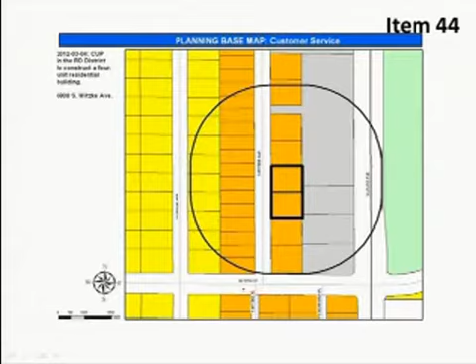Again, Mr. Glenn Foster is the petitioner representing Cascade Townhomes. This is a proposed development in the Platinum Valley Edition, west of South Louise Avenue and just north of West 77th Street. Mr. Foster had requested approval to construct 2 4-plexes. This is an area that's zoned such that a 4-plex requires a conditional use permit. Single family and twin homes would be allowed without a public hearing.

At the public hearing for the Planning Commission, we have a consent agenda. This was on the consent agenda based on the lack of public input that we had heard or comment. And unfortunately, some of the citizens that were present at the Planning Commission meeting, there was some confusion that they were not able to get up and speak and ask this to be considered as part of the regular agenda. So after the Planning Commission approved this as part of their consent agenda, we heard from the group of neighbors that they would like this to be heard one more time.

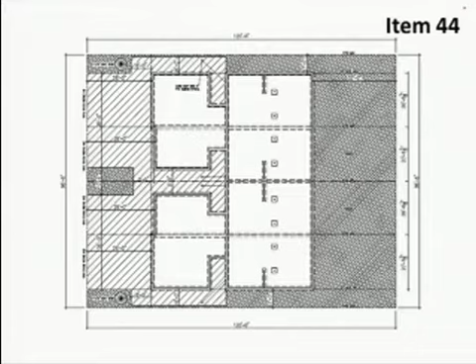In this particular area, there are existing fourplexes directly to the north. On the west side of Witzke Avenue is twin homes, and then west of that is single family. To the south of the proposed fourplexes is currently vacant, proposed for twin homes, creating this transition from fourplexes to twin homes. And then to the east of the fourplexes is commercial and office abutting up against Louise Avenue.

The appeal was submitted by the Witzke Homeowners Group, the residents of the twin homes on the west side of the street. Their concern is the value of the fourplexes, the proposed construction value, the market value of those structures. They also have concerns about parking and traffic along the street.

Mr. Foster is here tonight to speak to the neighborhood concerns. He conducted a neighborhood meeting prior to the Planning Commission hearing. The fourplexes will be two-story buildings with 6 garage parking spaces.

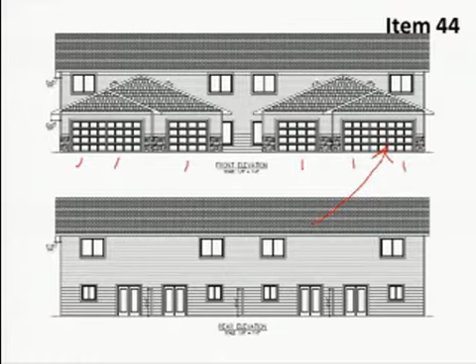Another change we want the neighborhood to know is that the existing fourplexes are 3 bedrooms, but these are proposed to be 2-bedroom. So that's a quick background. Both the applicant and the neighborhood association are here to comment on this item tonight.

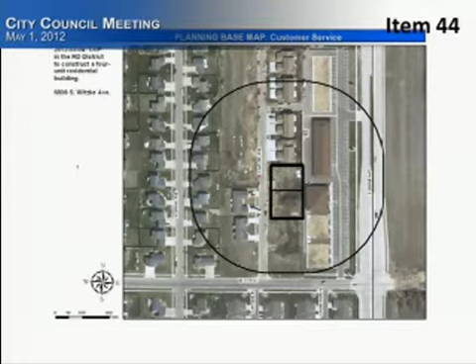So I guess my whole point is I want to keep the neighborhood bright. That's why we changed the bedrooms and increased the parking. We almost doubled the parking and decreased the amount of bedrooms, trying to take care of the problems that the neighbors are having over there. As far as the garbage cans, I know it's a city code ordinance for the dumpsters, and they're not my properties. So that's all I've got to say about it.

Thank you, Mr. Foster. Is there anyone else who wanted to speak to the council? Very good. Council, questions or comments or motions? Councilor Jamison.

If we could have Mike Cooper come back and help us a little bit. Mike, the pictures that we saw there with the neighbors, with the empty driveways, where are those homes compared to this picture? Those are to the north, or to the top. So they would be to the north of this proposed development, directly to the north.

Those are existing fourplexes. When they showed their own homes, where are those? They're on the west side. This photo is a little bit out of date, but okay, right, across the street. So if those two homes that are across the street would just be continued north?

Correct. And then again, to the south of the property that we're considering tonight will be twin homes. So those will stay twin homes? Yes. But the ones outlined would move to the request for those to be the fourplexes.

Councilor Rolfing: For the association, could you answer a question for me? Sure, come up please.

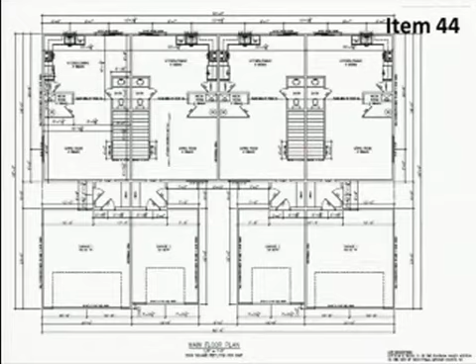The other thing is, you stated that the property to the south there was twin homes. Will be twin homes. It's still vacant. Are you positive they're going to be twin homes, and they won't come and ask to build something else? Yes, we would not support it if it did come forward, but yes. That's the understanding of everybody, that that will be twin homes. It's the understanding though, that they're not going to come and ask for fourplexes? Yeah, that's based on previous public hearings that we've had, and it's a different property owner.

Councilor Anderson Jr.: Mike, if you're not going to support fourplexes there, and you have twin homes to the north of this proposed development, why are we putting fourplexes in the middle of a bunch of twin homes? Yeah, when we had previous public hearings on this item, it was primarily based on the type of office retail that was along Louise Avenue. And so as we got closer to 77th Street, across 77th Street to the south, that was kind of the transition area to get more in line with what's on the south side of 77th Street. So we were trying to solve this whole thing of transitions that we talk about with you all the time. Okay, thank you.

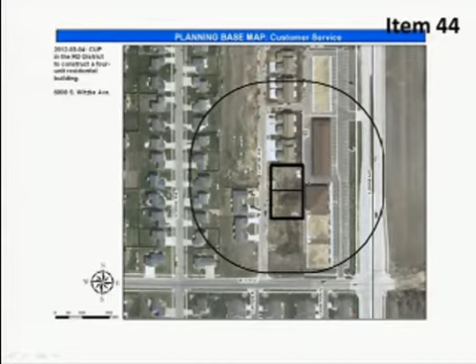I don't buy this transition thing. I think the transition is to twin homes there, and the transition stopped at 77th Street and started south of 77th Street. So I guess I would urge a no vote on this one.

Hearing no further discussion, we'll have a roll call vote, please. Councilmember Jamison? Yes. Karsky? Yes. Rolfing? No. Aguilar? Yes. Anderson? No. Brown? Yes. Entenmann? Yes. Erpenbach? Yes. That is passed 6-2.

Item 45 is a special one-day malt beverage and special one-day wine license for Sanford Health to be operated at the Sanford Center, 2301 East 60th Street North, for the Chamber Mixer to be held on May 15th, 2012. Item 46 is a special one-day malt beverage and special one-day wine license for Almost Home Canine Rescue to be operated at the 8th and Railroad Parking Lot, 401 East 8th Street, for the 605 Summer Classic to be held on June 22nd to 23rd, 2012. And item 47 is a special one-day wine license for Senior Citizen Services Incorporated to be held at Active Generations, 2300 West 46th Street, for a fundraising concert on May 10th, 2012.

Mr. Mayor, I need to recuse myself. Councilor Entenmann, thank you.

Jamie Palmer, Licensing Specialist. I'm here to speak to items 45 through 47, and I'd be happy to take any questions you have. Lori is here to assist me with any questions. Thank you, Jamie. Council, any questions or comments of Jamie?

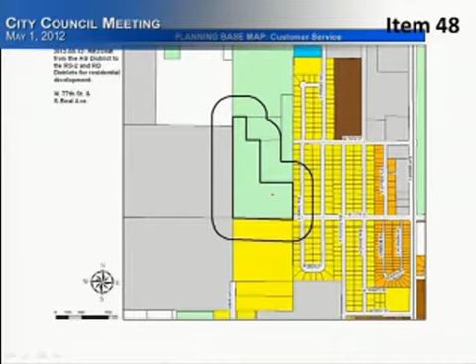Item 48 is a second reading, an ordinance of the City of Sioux Falls, South Dakota, rezoning property at West 77th Street and South Beal Avenue from the AG Agricultural District to the RS2 and RD Residential Districts, petition number 2012-0312, amending the official zoning map of the City of Sioux Falls. The Planning Commission recommends approval. This is a petition submitted by Don Runge to allow this property to be developed into residential uses. The City Council approved the annexation of this, and now the property is being requested to be rezoned from agricultural to residential. This is generally located just to the north and west of the Harrisburg Explorer Elementary School. The site is approximately 18 acres in size.

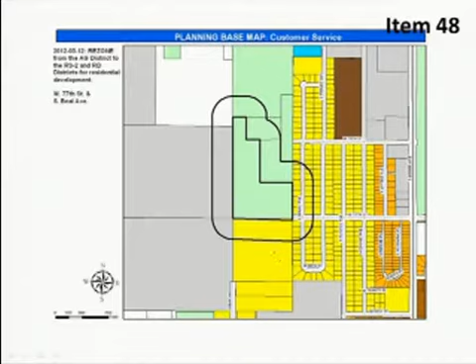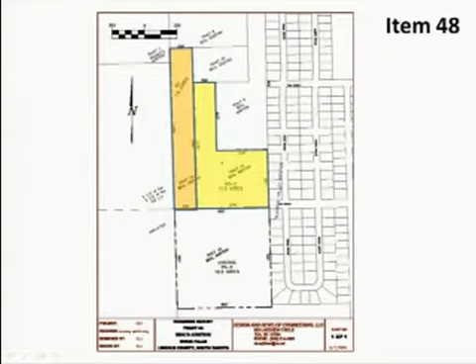The request is to change this into two different residential zoning districts. On the west side would be approximately 7 acres of RD residential, which, as we heard prior to tonight during the appeal, allows single-family and twin homes without further public review, and fourplexes would require a public hearing by conditional use. The rest of the property, approximately 11 acres, is proposed to be zoned RS2, where single family is allowed as a permitted use and twin homes would be allowed through a conditional use permit approval process. This is an area with services available in terms of utilities and street improvements. It's been reviewed by staff, and the Planning Commission has made a recommendation to make these zoning changes.

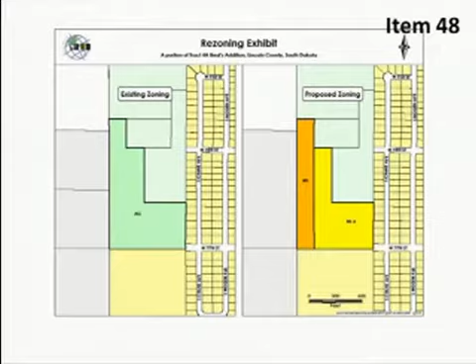Mr. Cooper noted we did not receive any neighborhood concerns on this one. This is a second reading, so if anybody wants to address the council on this topic, you certainly can.

Council, any questions, comments, motions? Councilor Rolfing moved approval, seconded by Councilor Entenmann. Councilor Rolfing's made a motion to approve item number 48, seconded by Councilor Entenmann. If there is no further discussion, a roll call vote, please. Council members Jamison, Yes. Karski, Yes. Rolfing, Yes. Aguilar, Yes. Anderson, Yes. Brown, Yes. Entenmann, Yes. Erpenbach, Yes. Thank you. That has passed 8-0.

Item 49 is the second reading and ordinance of the City of Sioux Falls, South Dakota, a major amendment petition number 2012-0318 to Chapter 15.45.070, Plan Development Districts, at the southwest corner of East 57th Street and South Sycamore Avenue, amending the Village at Sycamore and 57th Street Plan Development District regulations. The Planning Commission recommends approval.

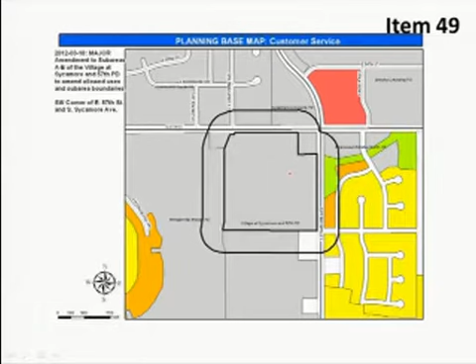Mr. Cooper explained this is a petition submitted by Joel Dykstra on behalf of the Robert Broyne Living Trust, owners of the property. It's at the southwest corner of 57th and Sycamore, consisting of approximately 37 acres. There's history here: back in 2008, the City Council approved a zoning concept for a mixed-use village consisting of a variety of commercial, office, and residential uses. The current property owner and developers are now looking at going back toward a more traditional zoning configuration because they believe that would better serve the market for future development in this area. In this case, commercial would change to approximately 23 acres of land area, and 14 acres would be multifamily residential. So it doesn't significantly change the previous land area in terms of zoning uses, but it's more that traditional configuration of commercial frontage along the major arterial streets with multifamily residential abutting that.

And I believe that the applicant is here tonight as well if you have any questions. Thanks, Mike. Another second reading.

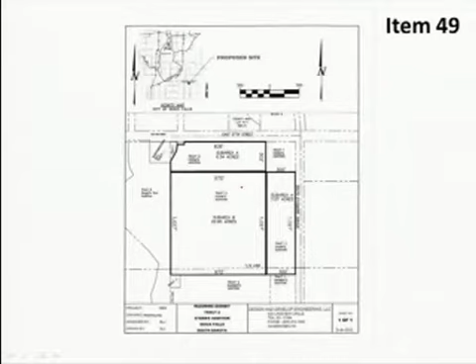Would anybody be interested in engaging the council on this topic? Very good. Council, move for approval, Anderson.

Second, Karski. Councilor Anderson has made a motion to approve item number 49, seconded by Councilor Karski. If there is no further discussion, a roll call vote please. Councilmember Jamison, yes. Karski, yes. Rolfing, yes. Aguilar, yes. Anderson, yes. Brown, yes. Entenmann, yes. Erpenbach, yes. Thank you, that has passed 8-0.

Item 50. Item 50 is the second reading of an ordinance of the City of Sioux Falls, South Dakota, rezoning property at the northeast corner of the intersection at South Cliff Avenue and East 69th Street from the O Office District to the C4 Planned Commercial District, petition number 2012-0204, and amending the official zoning map of the City of Sioux Falls. The Planning Commission recommends approval.

Thank you, Mr. Cooper. This one we might get some public testimony. We'll see, expecting it. Thanks for the levity, Mr. Cooper.

Thank you. For this particular item, joining me tonight in terms of city staff and our team, in addition to Steve Randall, we have Jeff Schmidt representing the planning office. Jeff has been our lead person in addressing questions from city councilors, talking to some of the public as well as the media about this proposed development. From Public Works, we have our team represented by Mark Cotter. Heath Hoftieser is here to answer questions about the traffic impact study. And Andy Berg is here to answer any questions you might have about the proposed drainage improvements. Those are the primary areas of questions that we've been getting since the Planning Commission hearing on this item.

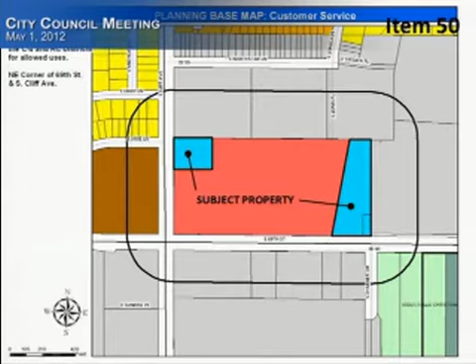So this is what you are being asked to consider tonight: the potential rezoning of the 2 parcels of land shown in blue. In between those, we have existing commercial zoning. So again, this shows you on the left side the current zoning, and on the right side the proposed zoning, which would change the 1 acre of office into commercial for parking, and the just over 2.6 acre office area into recreation conservation for a proposed stormwater detention area.

So tonight, this is really a land use item that you're considering. In terms of approving a development plan, that will not be the outcome of tonight's council hearing. You are not approving a development plan tonight. With our zoning ordinance, we have the zoning, which establishes the land uses, and then we have, for this particular size of commercial area, a conditional use permit requirement. I'll talk a little more about that as I go through my presentation. The conditional use permit is where we would deal with the development plan approval. I'll repeat that at least 2 more times before I'm done tonight - what you are being asked to consider tonight is a land use question of these 2 parcels.

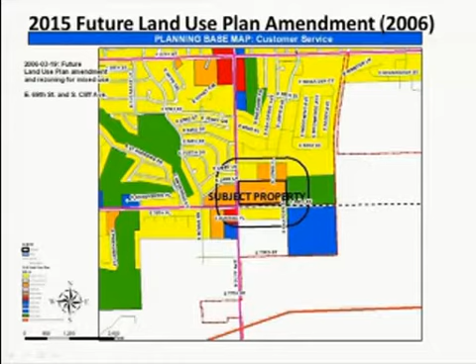The next slide gives you a little background because I know people are interested in how we got to this point. Back in 2006, we received a petition by a developer/landowner to change the proposed land use of this northeast corner of Cliff Avenue and 69th Street. At that time, our 2015 comprehensive plan showed this future land use as multifamily residential. We were approached by a developer interested in changing this to commercial. So the City Council approved a land use amendment to the comprehensive plan in 2006 from multifamily to commercial.

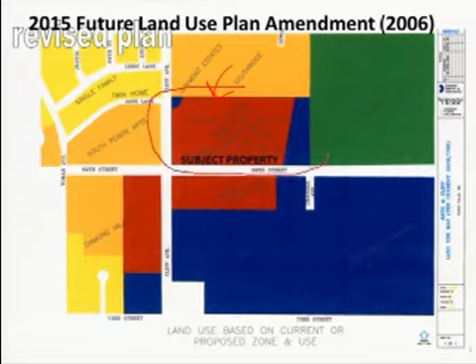Also in 2006, there was a rezoning petition submitted for this particular area. That resulted in the 1 acre of office, the approximately 17 acres of commercial, and then the additional just over 2 acres of office on the east side. At that time, the proposed land use was going to be some type of retail commercial, but nothing specific was being proposed at that time. The developer just wanted to get the zoning in place so that they could begin to market the property.

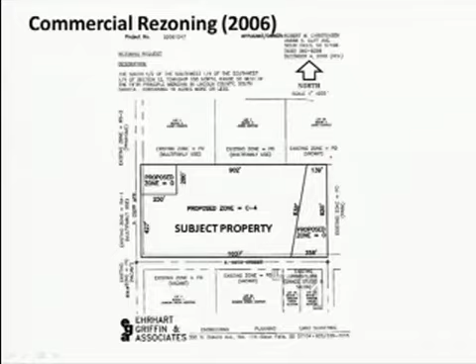Later on in 2010, we received a conditional use permit request specifically for a Hy-Vee store on this corner. The Hy-Vee store was going to be built within the confines of the existing commercial zoning, and it showed the store, the parking, the access points off Cliff Avenue and 69th Street, as well as a proposed gas facility on the very corner of the site.

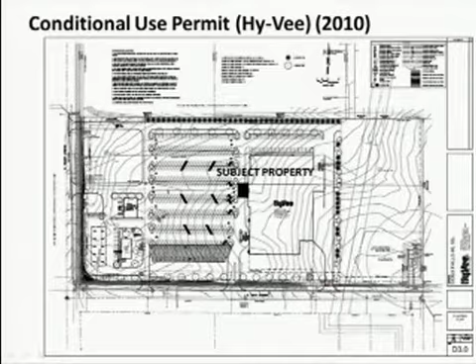That conditional use permit was approved in 2010, and it also included Hy-Vee's allowance to have an alcohol license because of the proximity to Sioux Falls Christian School. That was also part of the conditional use approval at that time. As everybody knows, Hy-Vee decided not to build here. They purchased the Sunshine store at 57th and Cliff and converted that into the Hy-Vee store.

So now we're back to today with a proposal from Walmart to move forward with a conditional use permit action on this corner. But prior to doing that, they wanted to bring in a change to these two parcels so that the zoning would match the proposed land uses. The 1 acre parcel is being proposed for parking, and the 2.65 acre parcel is being proposed for stormwater detention.

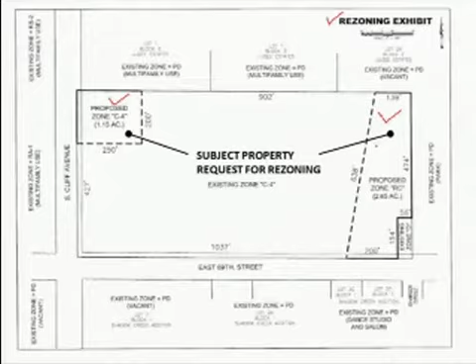Under the current zoning, the stormwater detention could go in office, and the other smaller office parcel can be used for access, but it could only be used for parking in conjunction with an office building. So again, the intent tonight is to look at the land use changes that Walmart is asking by changing the zoning on those two parcels, which total less than 3 acres in size.

Now, that's where we would typically end the discussion as far as zoning and land use. But we know that because of the interest in this property and the type of development being proposed, a lot of the questions we've been getting from councilors, the public, the media, are really more about what we would look at during the conditional use permit review process. So what I want to quickly go through tonight is the type of information we would review, and we've already had preliminary discussions with Walmart about the site development plan versus the land use and zoning.

They had submitted to us a proposed development plan that shows the building footprint, landscaping. We would look at a very detailed landscaping plan, lighting plan with photometrics, so we'll be able to know exactly what the light intensity will be along the property lines, as well as within the parking lot.

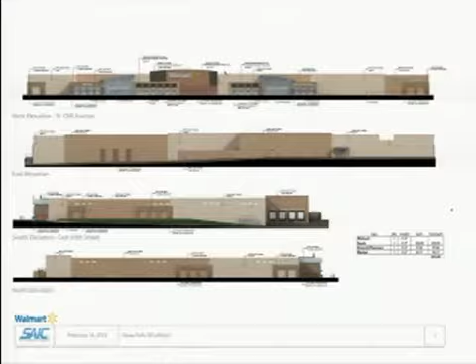The next one is probably the big one that we've heard the most about, which is the traffic impact. For this size of commercial development, we would typically ask the applicant or developer to conduct a traffic impact study, and in fact, we had one done for the Hy-Vee store.

Walmart has hired a private consulting engineer to do a traffic impact study that has been reviewed by our city staff. It tells us the projected traffic flow through this intersection of 69th and Cliff, where trucks will come in and leave, as well as customer parking, and what type of street improvements should be programmed to accommodate both existing and projected traffic through the year 2035.

With our long-range transportation plan and the modeling we do, we're looking 25 years out into the future. So Walmart has hired a consulting firm to do this, and Heath is here tonight to give you more of a summary of the findings and the improvements recommended for this particular development.

As we've talked about this traffic impact, in the past we've allowed commercial businesses to construct their building and get an occupancy permit, then we'll come along within a year, 2 or 3 or longer, and make improvements to the transportation system. That might be done because of budgeting or other logistical reasons. But as we've talked to Walmart, the public, and to you, Councilor, tonight...

With this proposed acreage of the store being considered, Walmart will pay about $250,000 in platting fees that goes into our arterial street construction fund. But right now we don't have the improvements for this intersection budgeted within our capital program. Mark and his team have estimated that, and he can speak to this more eloquently than I can, but we're estimating the engineering and build-out is going to be just over a $4 million project.

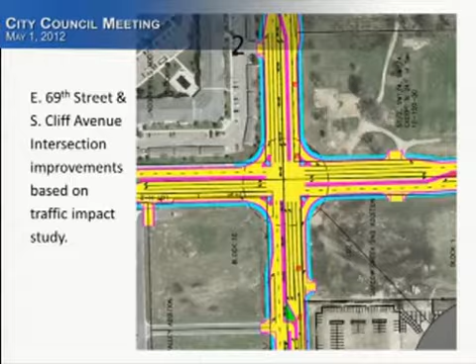The total potential building in 2010, including the office zoning areas, was just over 160,000 square feet with about 644 parking spaces. By changing the zoning to that 2.6 acres of office, as well as the 1 acre of office, the projected building square footage now would be just under 153,000 with just over 600 parking spaces being provided.

And again, tonight we're not approving the development plan, but this is based on the preliminary information that we've looked at up to this point.

Another question was the alcohol license. Again, through our zoning ordinance, if an alcohol license is requested within 500 feet of a school, it has to be approved by a conditional use permit. Based on our preliminary review of what's been proposed, it's measured from the nearest corner of the commercial building to the nearest property line of the school. Based again on the preliminary development plan we've seen so far, that distance is about 570 feet. But since we don't know for sure if this is the final development plan, that's the best information we can provide tonight. We would place it on the owner of the property to either include this as part of the conditional use permit or to assure the city that it would not be within 500 feet.

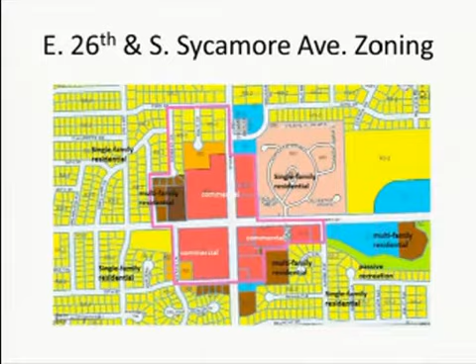So the last slide that I have—whoops, I guess we have two more—this shows a comparison of the 26th and Sycamore zoning, and it's the same amount of commercial zoning as what's in the 69th and Cliff Avenue intersection.

I think I mentioned this at first reading, but when the Hy-Vee store went in on the northwest corner and the Lewis Drug Store went in on the southwest corner, we did hear a lot of concerns from the adjoining residential property owners. They were concerned about everything from traffic to lights to trash and noise and property values. So again, through the conditional use process, we tried to address those as best we could, and those commercial uses have been there for some time. So we have a history of listening to neighborhoods' concerns and trying to address those with development through the conditional use permit process.

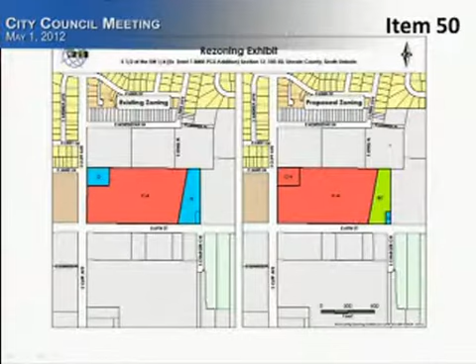Final item I'd like to address is the overall capacity of the streets and intersections in this area of Sioux Falls to handle this type of traffic count. I personally live and work in this neighborhood and can tell you that Cliff Avenue is difficult to travel as it exists today.

It is difficult to enter traffic from many of the side streets depending on the time of day, especially during the peak hours looked at for the traffic study. Customer and truck traffic coming from Interstate 29 and 229 for deliveries would have to take Cliff Avenue or 69th Street to get to and from the Walmart store. It does not appear that the current street and intersection configuration can handle the capacity needed for this development or for the 2035 study needs. I would ask the city to further study the impact of this development as it relates to other neighborhoods in the 5-mile radius of the Walmart store. Thank you for your time, and I ask that you deny the rezoning proposal.

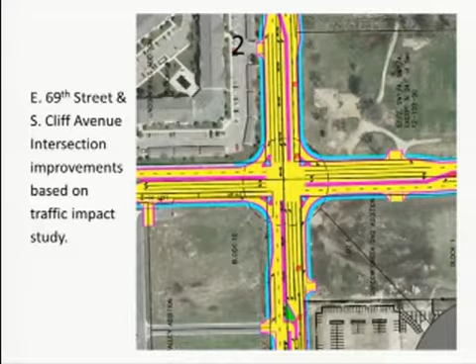Concerning streets, can you tell us - Councilor Jamison brought up the 2015-2016 timeline for the Cliff Avenue improvements going north of 69th Street. Can you enlighten us as to what those proposed improvements are going north, please, from that intersection? I can, and just to back up for a moment to set it up, we've studied this corridor from 229 all the way south to 85th Street, and that process started back in 2007, and in 2009 we started to meet with all the adjacent property owners at this respective intersection to model the traffic that we expect the entire area would be matured out to at 2035, and ultimately size the roadways and the access points accordingly.

So now we've taken a step back with that corridor study, and you'll start to see the first phase of improvements being built in 2012 at 57th Street and Cliff Avenue. That's going to greatly increase the operational efficiency of that intersection from about 54th Street south, and we can greatly reduce the delay people experience today.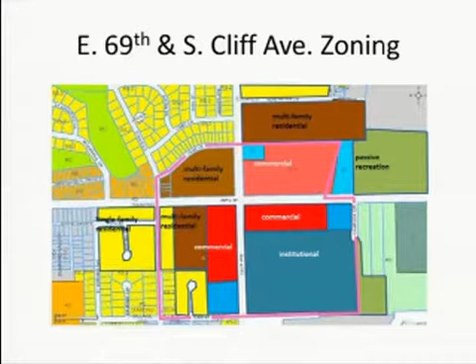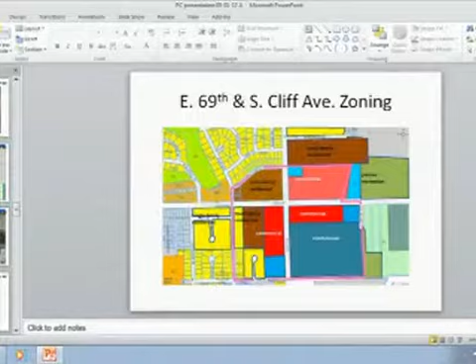Going further south, the corridor study identifies that as Sioux Falls development increases, along with traffic from Harrisburg, Canton, and northwest Iowa coming into Sioux Falls, that growth rate in traffic will be there over time. So we phase in the next improvement after this year's work. Just yesterday I sent a list to the City Council of our priority list for the community for the next two years, 2013 and 2014. Based on where this project fits in the priority list, I'd estimate it would be in the 2015 to 2016 timeframe.

What we would build is additional lanes south of 57th Street through the intersection of 69th and Cliff, then go east and west as shown in the corridor study image presented earlier tonight. That would give us a five-lane section from 57th Street south to 69th Street. At the intersection of 69th Street, we'd add additional left turn and right turn lanes to minimize the delay there.

So first and foremost, the first phase goes in place in 2012. That project's been bid, and it will be constructed before school is back in session. I would expect we'd bring this next priority forward in 2015-16 based on our current priority list and funding levels.

Councilor, I'm going to continue.

Another question concerning drainage, and I think you or one of your staff would best be able to answer this. It's come up several times concerning this drainage. We know that when you've got a big building and a lot of blacktop, you get a lot of water runoff because there's no grass to soak it in. Comments have been made that it'll go into a retention pond. There are definitely questions concerning the retention pond's construction and what it's capable of handling. But from there it goes into a storm sewer. Now, some folks have told me that storm sewer drains in front of the school there into the drainage ditch, and from there it goes downstream and ultimately ends up possibly causing problems, as we've seen with Schindler in the past. Can you address that drainage for us a little bit, and enlighten us more on that?

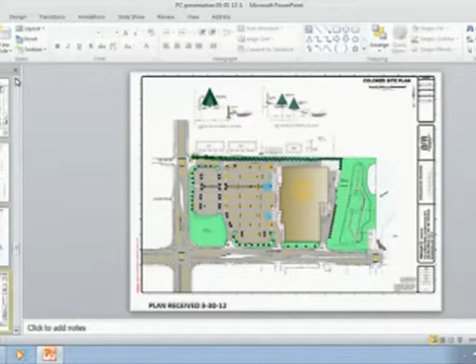With the conditional use, we would show what the proposed landscape buffer is going to be around that parking lot. What kind of trees, and how close together? Don't we have transition that we've been talking about all the time — from commercial to a duplex or a fourplex — and then here we're going right to an individual home? Yes, the transition there would be the parking lot. Yep, that's what they're proposing.

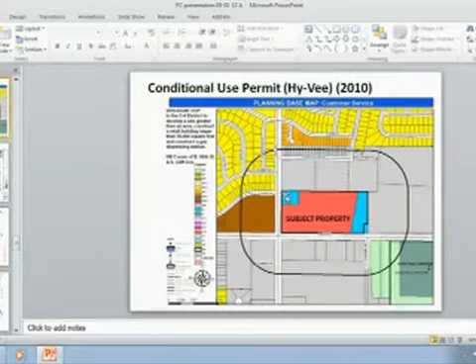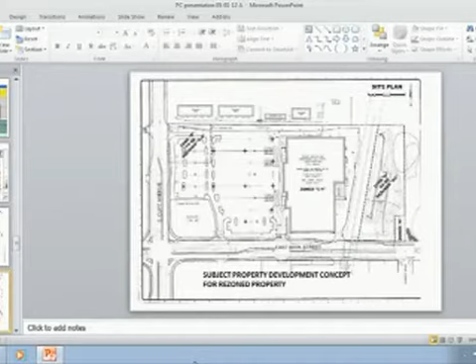So we're not going to have any transition in this situation? If we don't approve that, they could still use it for their entrance, but not the additional parking. So by office, they would just leave it O and put a driveway in there? Yes, they could still do that, or put a small office building in there. Then what would happen to their entrance? The entrance would still be allowed no matter what the zoning is. So that driveway shown is not dependent on office or commercial zoning.

I think that's maybe what you're trying to get at. That's what I'm trying to get at — that would be allowed either way. What Walmart is proposing is using that corner for additional landscaping and parking rather than putting a small office building on there. I see, that's what I needed explained — the driveway would go in there regardless, since that would be an entrance to the office if built, or parking if allowed for commercial use. Okay, got it, there you go.

Thank you. Councilor Brown: Mike, you've led into what I wanted to talk about — no matter what we do tonight, it doesn't stop Walmart from going into this spot, does it? They would need a conditional use permit, which would go to Planning Commission and very likely come to you. Because anybody can appeal a conditional use — so how does changing this rezoning make the plan better? It makes it consistent with what the proposed land uses are intended to be — that corner for the parking lot, the east side for the detention pond. Thank you.

Councilor Heineman: I do have a question for a Walmart representative. I'm sorry, I can't remember the names of everybody that's out here. Please.

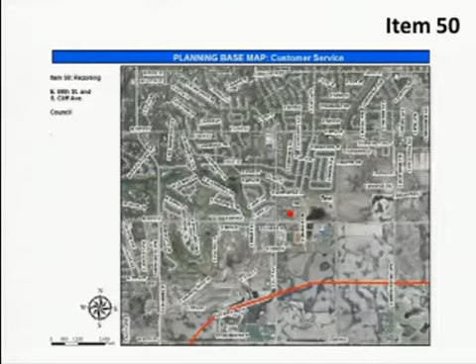Okay, and Steve, could we go back to the 26th and Sycamore intersection on how that was developed?

What I was surprised when I saw this was that there was residential, single-family, abutting the commercial. And on this new proposal, we have commercial kitty corner from a residential. But I was unaware that we were actually... how did this happen? I guess is what I'm trying to figure out, is how did this happen? Because it seems like it wouldn't be anything that we would ever duplicate.

Yeah, on the northeast corner is a manufactured housing park, which really predated this commercial development. And when that commercial strip mall was approved on the east side of Sycamore, north of 26th Street, again, there was extensive fencing and other separation provided. The Hy-Vee store in the northwest corner, again, that came in after a lot of that residential was already there. And we had the same issues about the truck traffic coming in, loading and unloading. And if you go by there today, you'll see that they put up extensive fencing and landscaping as a way of providing that buffer. And the Lewis Drug Store was the same way.

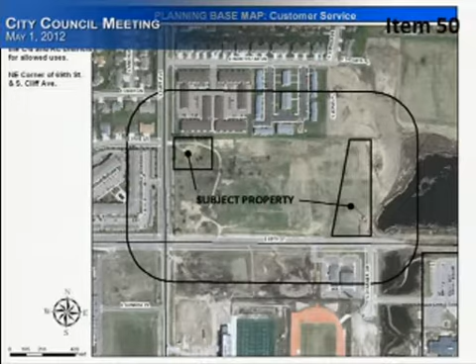I guess I want to go back to the roads again, especially Cliff Avenue, and talk about the access to this property, especially with semi-traffic. I guess my issue is, and in speaking with the Walmart officials too, is I have a problem with semis having to cross oncoming traffic to be able to get into that property. And I just see this property as being awkward for access to allow these semi-trucks to get in there and supply that property. And even off of 69th Street, I was trying to see if there was another way that they could come in there.

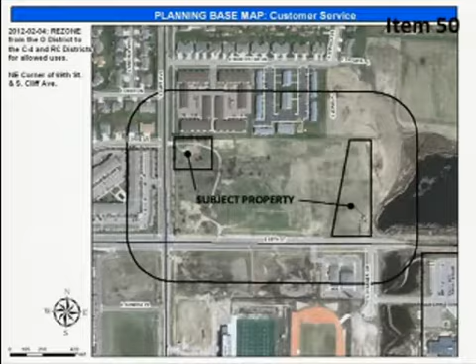I'm really concerned about that intersection at Jane Lane, how that is all going to work. And right now, if we're talking that we can't expand that road till 2013, 14, 15, a semi is going to have to sit in that one lane for southbound traffic and jam up that entire road and intersection. So I guess I was told that the traffic signal is off the plan. Is that correct? Right. We would not support it based on how that would address the progression of vehicles on Cliff Avenue.

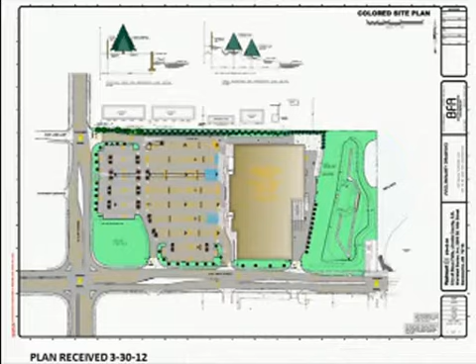And I think just from a traffic standpoint and an ingress egress for the development, I'll have Heath start, and then I know they also have their traffic engineers here as well. So Heath, do you want to come up and address this?

Up on the screen, this is the capacity analysis for the intersection of Jane Lane and Cliff Avenue for the opening day situation, with the store being built and the existing traffic added to the traffic from the store. It was discussed earlier that there is a level of service F at this intersection under these conditions.

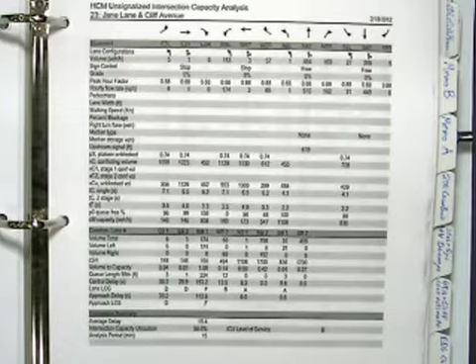As you can see on the screen, it's one movement - the westbound left out of the parking lot that is a level of service F. It's near the bottom right. The other movements at the intersection with the existing lanes on opening day would be D's, B's, and A's. They would be considered acceptable movements.

This westbound left turn out of Jane Lane onto Cliff Avenue is very comparable to the intersection at 26th Street and Marion Road, the driveway at Berkshire Boulevard and Marion Road, trying to take the westbound left out of that intersection. That's also a level of service F at 104% capacity. This particular one is projected at 109%. That's just to give you an idea of what the failed condition is here for this movement, and it's something we have around the city at a lot of different commercial developments, and we weigh different options through the traffic study.

The traffic signal at this intersection makes it so that the levels of service are better for coming out of the driveway, and they overall meet what we ask for our standards - that would be a C or better in that situation. But we felt that it was too big of an impact on Cliff Avenue traffic, just traveling northbound and southbound. It would stop too many cars on Cliff Avenue. So we thought it was a better solution to not have the signal in place and have the westbound left out of the parking lot at this location be at capacity.

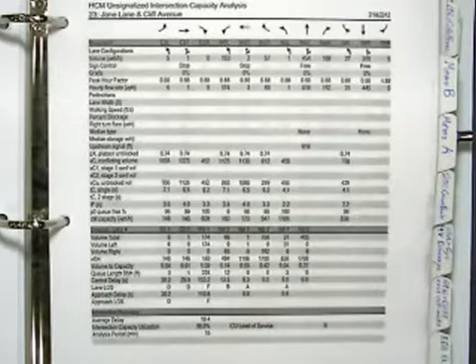Council, you've had some really engaging questions and good comments. Realizing that we don't have to end those questions or comments, I would ask you to consider making a motion. Again, we can continue the discussion after that, but just in the spirit of moving the meeting to the next phase, would anybody be willing to make a motion on this particular item?

Move to approve, Erpenbach. Second, Jamison. Councilor Erpenbach has made a motion to approve item number 50. It was seconded by Councilor Jamison. Is there any discussion?

Councilor Entenmann: Just a comment - the process has gone very well. Both the citizens and their involvement have been super. They've answered questions for us. The professionalism of the Walmart people is unquestionable in this case, and I'd like to thank you all for your involvement and your passion on this.

Councilor Karsky: Thank you, and again I want to thank everybody, both proponents and opponents, for basically sticking to the subject at hand, as this is a rezoning issue. I've made it my personal mission to keep neighborhoods and buffer zones as an important part of neighborhoods, and many of the homes in close proximity to this property were built when it was zoned for multifamily. It's slowly been eroded over time from that original intent, and I really can't support further rezoning of this property to more commercial from office.

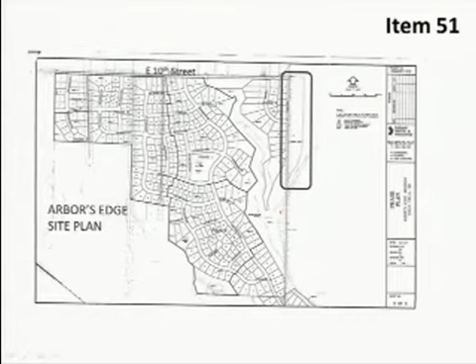Mr. Cooper, continue. The petitioner in this item is Chris Rallis. This property is located on the northeast corner of Arbor's Edge Development, in the northeast corner of Sioux Falls. It consists of about 9 acres of undeveloped land, within our future sanitary sewer growth area, though sewer is not currently available there. The applicant currently has 2 building eligibilities, and the rezoning would allow a 3rd site to be developed.

We've discussed this with the county planning staff and Arbor's Edge. They will share this mutual access road, and since it's within our projected sewer service area, they will build these structures so they can be hooked up to city sewer when it becomes available. The recommendation from the Joint Planning Commissions was to approve this request to change it to rural residential for a maximum of 3 housing units. We'll consider this at the joint meeting on May 21st.

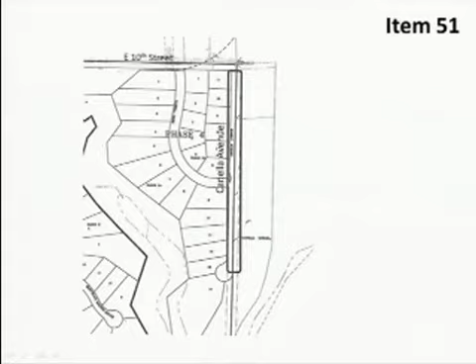Councilor Entenmann: Mike, just a question. The property owners who build their homes there, do they know they'll be required to hook on to city sewer when it becomes available? Mike: Yes, and that will be part of any agreement on this. We'll have the rezoning, and then also a preliminary subdivision plan approval process. Entenmann: Okay, thank you.

Councilor Erpenbach: Thank you, Mike, help me with this one. They're not in the city limits yet, is that correct? Mike: That's correct. Erpenbach: So they aren't part of the existing development, they're just going to use the same road? Mike: Yes. Erpenbach: Okay, thank you.

Councilor Rolfing: Mike, is this one of the areas we're looking at for possible annexation? Mike: Yes. Rolfing: Okay, yep. Mike: And we'll be working with the land use committee on that plan.

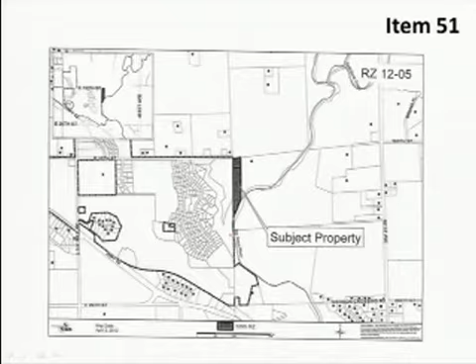Council, would anybody like to set a date of hearing and second reading for Monday, May 21st at 5:30 at the joint City Council / Minnehaha County Commission meeting for this item? So moved, Entenmann. Councilor Entenmann made that motion, seconded by Councilor Rolfing. If there is no further discussion, a roll call vote, please.

Item 52 is a resolution advising and giving consent to the appointment of members to certain citizen boards, and is for the appointment of David Nelson to the Airport Authority Board.